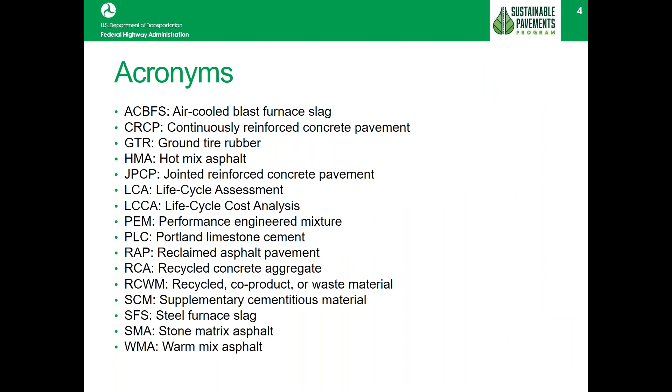Good afternoon. Our speakers for today will be Khadija Ngozi Bullock and Tom Yu. This is a list of acronyms that will be used throughout the presentation, so if there's something you need to come back and check, this is where you'll find it.

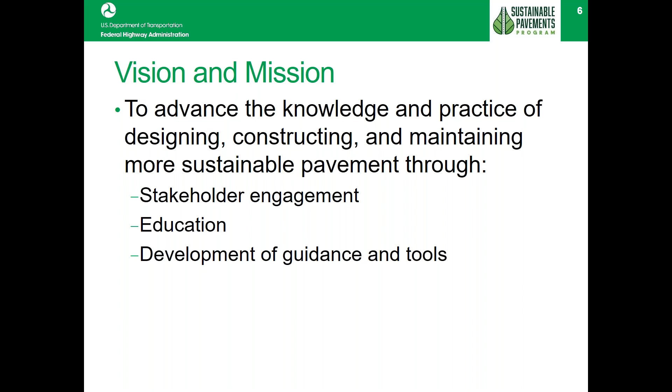I'll give a quick background on the Sustainable Pavements program, which began in 2010 with the vision and mission to advance the knowledge and practice of designing, constructing, and maintaining more sustainable pavements through stakeholder engagement, education, and development of guidance and tools, which this series of presentations is part of. Also part of this is the development of the Federal Highway Administration Sustainability Ambassadors Program, a group of FHWA employees from different disciplines whose main goal is to expand knowledge and outreach within their field, complementing the Sustainable Pavements program.

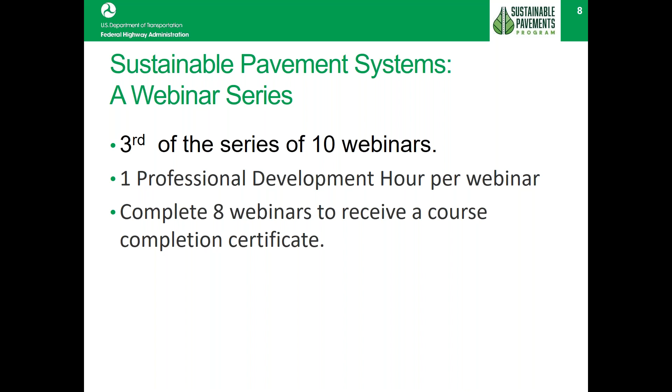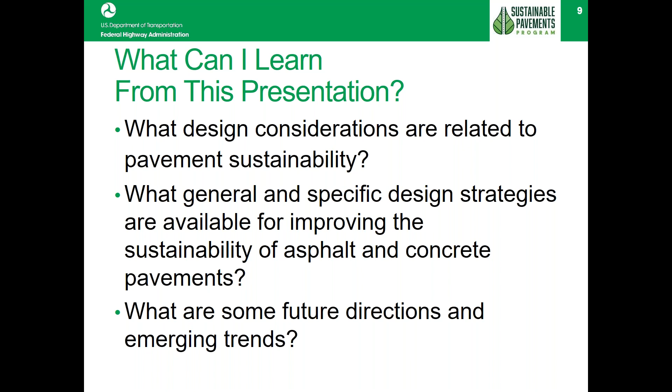What you should be expecting to learn today from this presentation: what design considerations are related to pavement sustainability, what general and specific design strategies are available for improving the sustainability of asphalt and concrete pavements, and what are some future directions and emerging trends.

From the Sustainable Pavements program, the first thing we developed was a definition, addressing why we should focus on sustainability. The goal of our sustainable pavements definition is achieving engineering goals by preserving and ideally restoring surrounding ecosystems, using financial, human, and environmental resources wisely, and meeting basic human needs such as health, safety, equity, employment, comfort, and happiness.

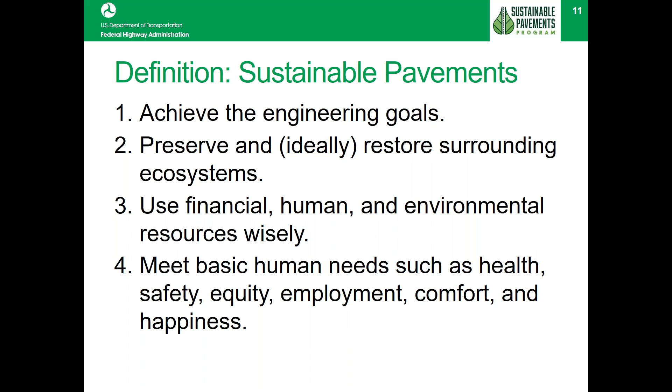With that, the benefits of being more sustainable focus on the triple bottom line, which includes not only economic benefits, but also environmental and social benefits.

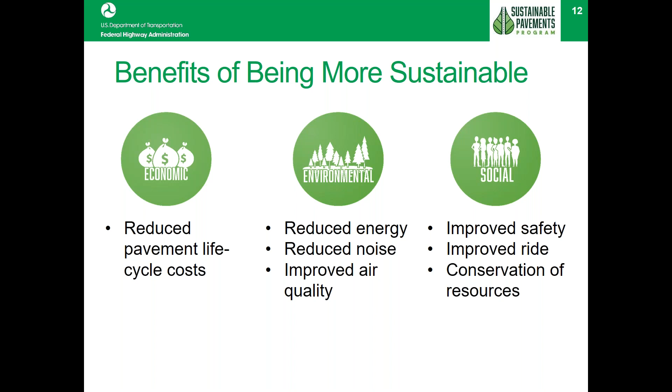There are opportunities for improving sustainability throughout the pavement life cycle, and today's webinar focuses on the design aspect of the pavement life cycle.

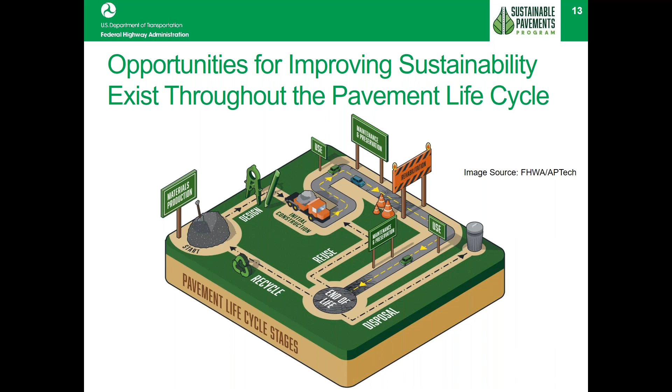Sorry about that, I got ahead of myself. With that, I will turn it over now to Khadija Ngozi Bullock, who will be presenting about the design considerations for pavement sustainability.

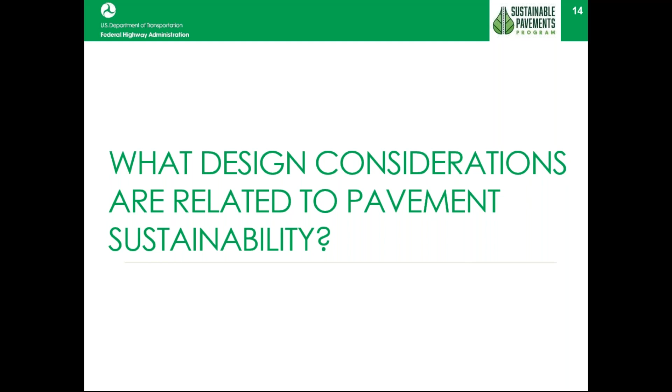Thank you, Monica. I'm going to talk a little bit about some design considerations related to pavement, and then I'm going to go into some general strategies for improving pavement sustainability, and then I'm going to apply some of those strategies specifically to asphalt pavement.

This slide shows several factors that affect pavement design. The first few we're probably all pretty familiar with. We're all concerned with the performance life when we design pavement, and we're at least concerned with the initial smoothness or friction of that surface during our pavement design.

But I'd like you to also take a look at other design aspects, such as reducing noise or splash spray, or reducing urban heat island effect or local thermal environment. These attributes all have an environmental, social, or economical impact, or a sustainability impact, and we can use these areas to reduce our impacts overall or have a higher sustainable pavement.

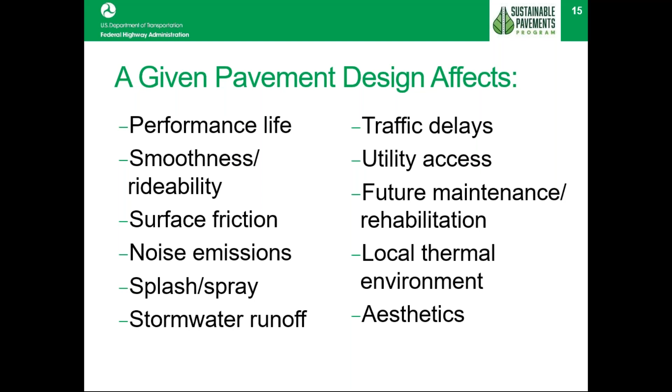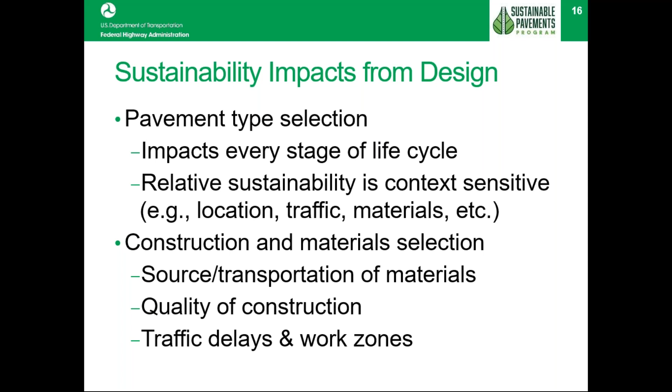So if we take a look at sustainability in our pavement designs, we should be looking at the entire life cycle of the pavement. Now, usually as a pavement designer, I am concerned with getting a low initial construction cost. But if our agencies would really take a look at targeting a low overall life cycle cost while taking a look at really good pavement materials and really good construction practices, and reducing traffic delays and reducing fatalities in work zones, we will come up with a very good product.

Now, if we look at the use of that pavement and think about sustainability impacts, if we think about not only applying a smoothness criteria during the initial pavement, but throughout the life of the pavement, we will have a more sustainable pavement. We know that rough surface will have higher fuel consumption and particularly higher emissions. So a smoother surface would reduce that while also potentially reducing safety concerns.

A longer life pavement generally means initial higher costs, but for the life cycle of that pavement, there would be reduced costs. And we should also take a look at not only the initial construction, but how we will be rehabilitating that pavement over its life cycle. And then at the end of that life cycle, what will happen to that material?

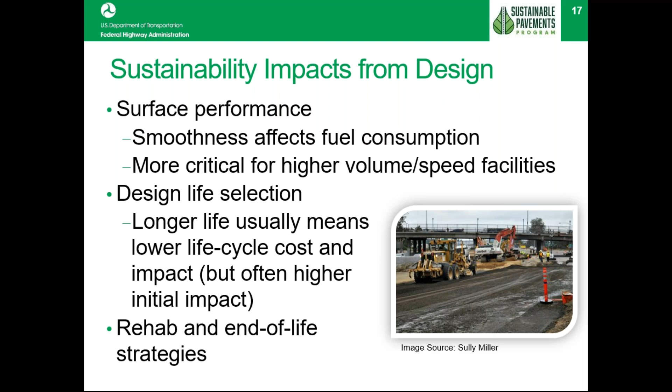Talking a little bit about some of the design aids that we can use for a more sustainable pavement system. This slide here talks about ME design. Now, I know all of us are using various methods for our pavement designs, whether they be a state or local table using state or local mix, or perhaps you're using the 1993 AASHTO Pavement Design Guide, or perhaps you're using the new ME design.

Some of the particular aspects of design that we should incorporate for a more sustainable pavement is to consider the entire life cycle of the pavement, to consider your construction techniques, to have a better way to identify pavement distress or the time it will take to achieve a level of pavement distress, and to be able to incorporate different types of materials will help you in providing a more sustainable design.

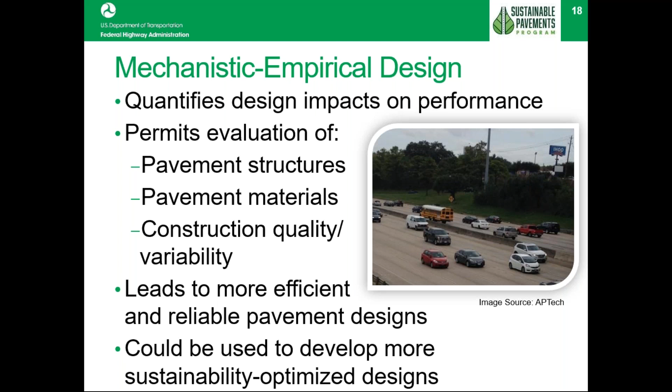And this will really help you to kind of minimize some of the pavement thicknesses, reducing material costs, and some other things that we'll talk about further in these slides.

In addition to a high-quality pavement design aid, we also need to look at design aids for life cycle cost analysis so that we can incorporate costs of the rehabilitation and preventative maintenance that the pavement will need during its life cycle. We should also be looking at environmental aspects, and a life cycle assessment can help us in taking a look at the environmental impacts of our pavement design.

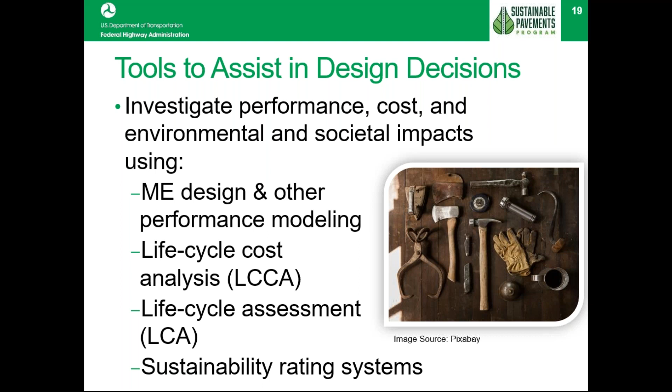As well, we should be taking a look at how we would be improving sustainability and applying some sort of rating or metric for that so that we can track our progress and compare projects. All of these sources, the Sustainable Pavements Program, has references on their website, and we will give you a link to that website at the end of this presentation.

Let me talk a little bit about some general strategies for improving pavement sustainability. The first I've already mentioned, that's achieving a longer life, and this is the longer life of the entire pavement. And I talked a little bit about doing that with a high-quality pavement design tool, as well as using high-quality materials and high-quality construction techniques.

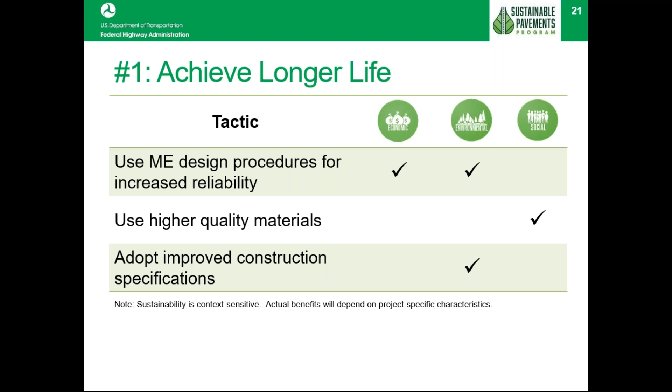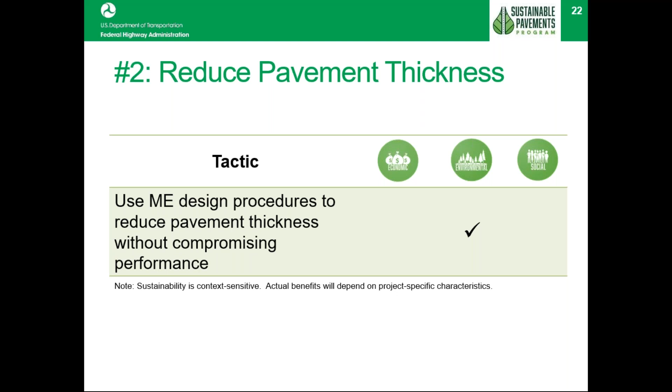In doing so, we will ultimately spend less money over the life of the pavement. If we reduce our pavement thickness, we will be reducing the materials used in the pavement system, which will ultimately reduce not only economic costs, but will contribute to less of an impact to the environment. And using high quality design tools can help us to do that.

We want to consider using a higher pavement structure in areas that require it, where we have high traffic lanes. So consider if you've got areas where you know you're going to be having higher traffic, or maybe you've got high occupancy lanes or truck lanes, consider maybe only doing deep or significant pavement sections in that area as opposed to applying that pavement section over your entire roadway.

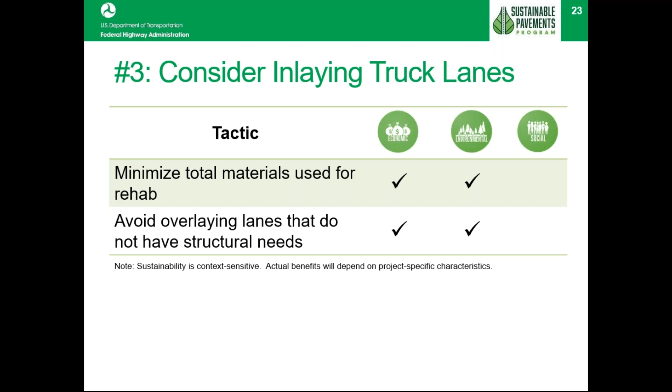Or, in another aspect, consider rehabilitation of your shoulders in a less stringent time frame than the rest of your roadway. This again reduces materials.

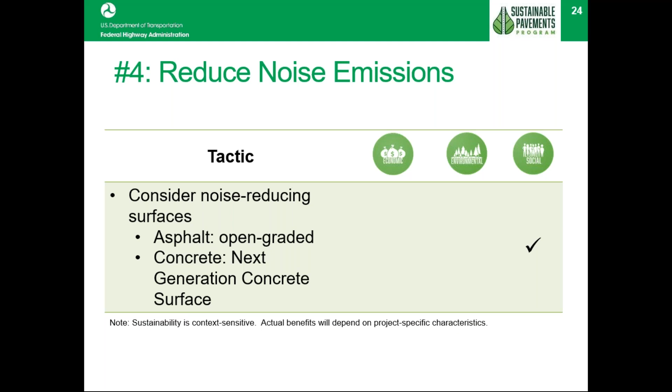We don't always consider this, but reducing noise is certainly a societal impact, especially in urban or residential areas. This is often done with the use of open graded aggregate in your surface asphalt mix. Sometimes you can also achieve a quieter ride with well-textured concrete.

Again, we'll talk about achieving and maintaining smoothness in our roadway as a way to improve sustainability. This helps us reduce fuel costs as well as emission costs.

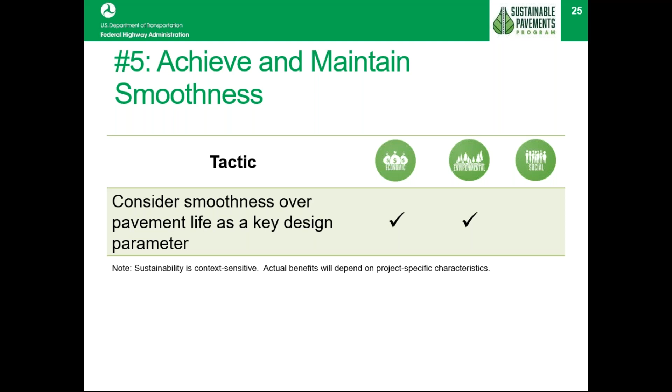Not only do we want to maximize the use of recycled materials, but also local materials. Our bottom line should be reducing the amount of transportation of materials brought into the site. This reduces a lot of impacts to our environment.

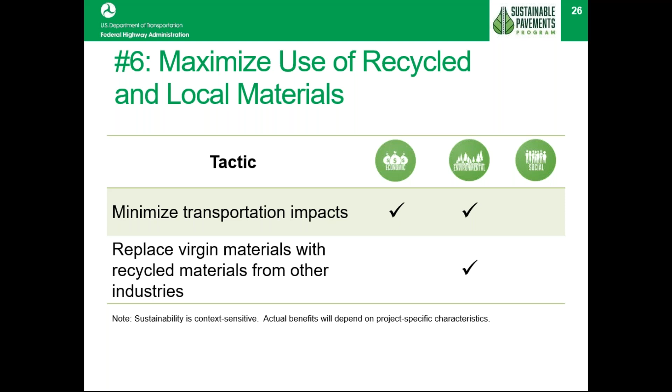But we should also consider, if we have the opportunity to use local virgin materials, we should do so, because it helps the social and economical aspects of the local area, and again, it reduces the amount of material we're trucking into the site.

We don't always have control over utilities, but if at all possible, we should coordinate with utility companies during the pavement design so that we have less impact to those utilities during construction. This means that if there's going to be some sort of utility repair, we try to get that done before we construct our new pavement, so we don't have fresh cuts coming in shortly after construction.

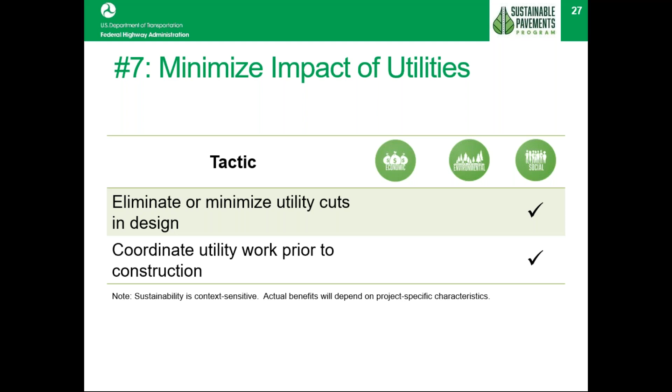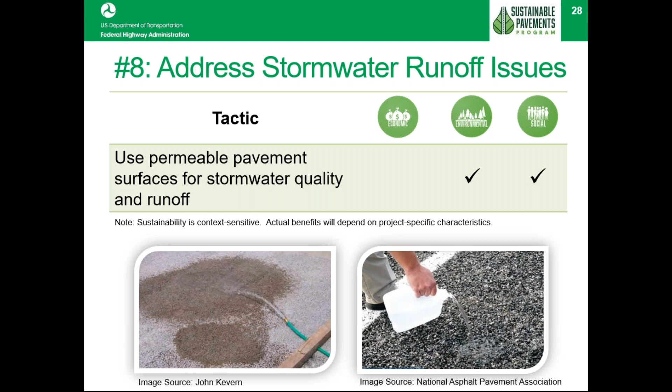In a more innovative approach, we should also try to address stormwater runoff issues, if at all possible, with our pavement designs. This isn't something we can do everywhere, and it's certainly something we should limit to very localized areas, but I'll talk a little more about that in the next section, where I'll discuss how we can apply some of these specific design strategies to asphalt surface pavement.

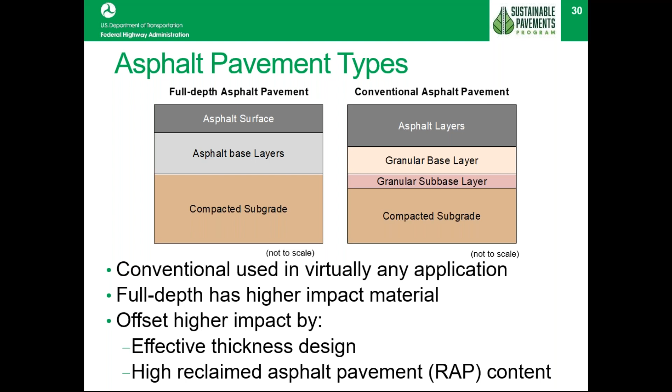Looking at your full depth asphalt pavement section on the left, where we often use higher quality asphalt in the surface materials, you can use recycled asphalt materials in your asphalt base layers. Again, both of these pavement structures could benefit from minimized pavement thicknesses with a high quality pavement design.

When you're faced with local virgin material that is not quite suitable for the traffic loading it needs to support, keep in mind that some sort of stabilizer, such as cement, can be used in these situations as opposed to trucking in higher quality granular material.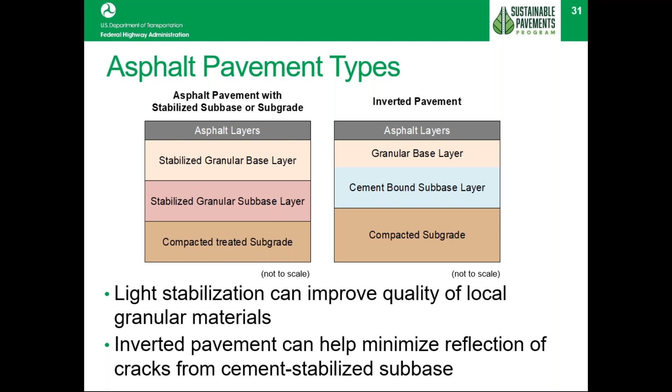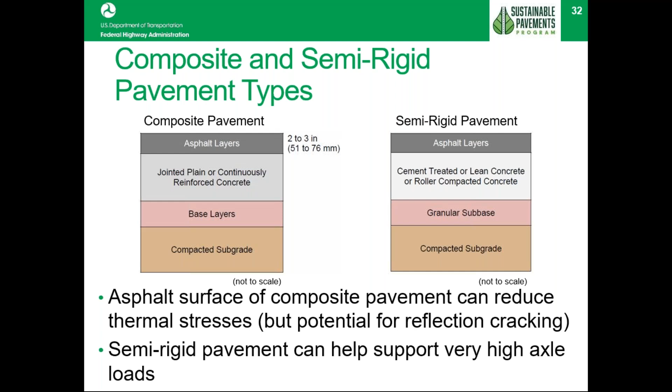Again, this is another way to treat or rehabilitate roadways, particularly if you've got a concrete roadway and need to rehabilitate it with a lower cost material such as asphalt.

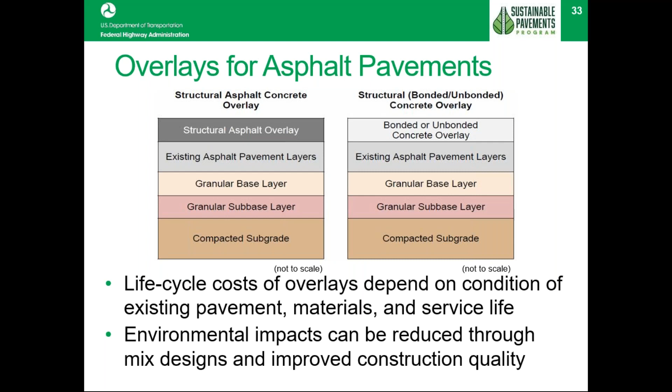Speaking of overlays, as I've done on most of these slides, here again is a reminder that overlays for asphalt pavements are a great way to rehabilitate your pavement and extend its life. We want to reduce the amount of material used in the overall pavement life, but use that material wisely to extend the life of that pavement as much as possible.

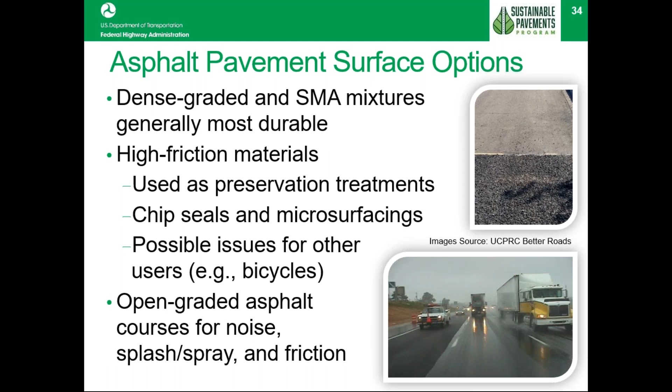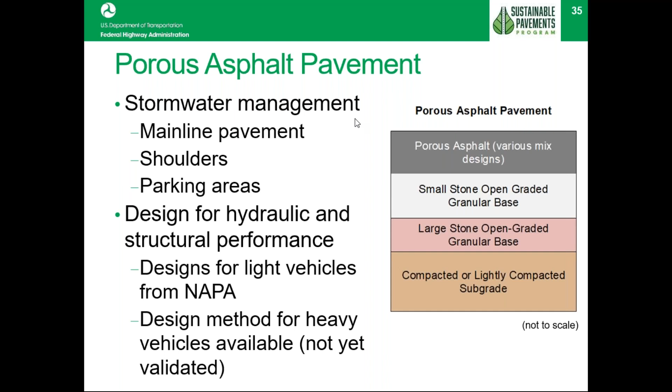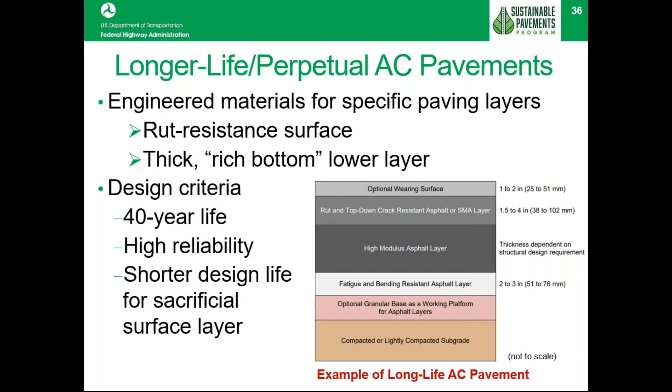Another innovative concept, which I've touched upon, is perpetual pavement. A more sustainable pavement has a sustained life cycle. The idea is designing a pavement with high quality layers to withstand the traffic load that will last for an extended amount of time, with the plan that you'll replace the wearing surface through frequent rehabilitation projects—this is the ideal pavement design for higher or improved sustainability. So when looking at pavement designs, you want to stress looking at the entire life cycle of the pavement, while also considering what it will cost, what materials will be used for rehabbing that pavement, and how you can reduce impacts to the overall environment and society.

So with that, I'm going to let my colleague talk about how you can apply these design strategies to concrete pavement. Tom is a pavement design program manager in the Office of Infrastructure at Federal Highway Headquarters in Washington, D.C., and he's going to talk about concrete pavement. Tom?

Thank you, Khadija. Yes, I'm going to be talking about sustainability for concrete pavements. Before I get started, I want to point out that both Khadija and I don't work on sustainability per se, but we are what's called sustainability ambassadors—people invited to participate in the sustainability program to become better aware of what sustainability is all about, see how it applies to what we do, and spread the good word.

What I've come to realize is that sustainability isn't something we do separately from what we normally do, but is becoming more and more a necessity. For example, for concrete pavements, in many places the availability of good aggregate is becoming more scarce. So dealing with that is becoming a necessity. Things like fly ash—the supply is becoming more scarce—so how we deal with that is becoming a necessity. In some ways we need to find sustainable solutions to do what we need to do. Sustainability is something where we may have to find solutions to the things that we need to do.

For concrete pavement, first of all, the primary benefit is its long life. There are many different types of concrete pavements, but today primarily we have jointed plain concrete pavements and continuously reinforced concrete pavements. The way we go about selecting pavement type depends on many things, primarily cost, but we could also consider sustainability as one of those criteria.

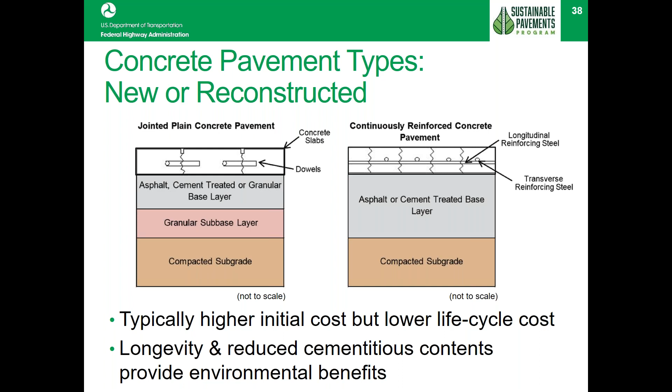In places where access is very difficult, in heavy urban areas for example, we might look for a very long life solution like CRCP, so that we don't need to disturb the public so often. So concrete pavement might often be considered a slightly higher cost option, but again, its long life is the benefit we get to offset that higher initial cost.

Composite pavement for concrete two-lift paving is something we can consider if we have issues with availability of quality aggregates, or if we want to utilize recycled material. We could use recycled or lower quality material in the lower lift and more durable material in the surface layer. This is one sustainability solution that helps us build quality concrete pavements.

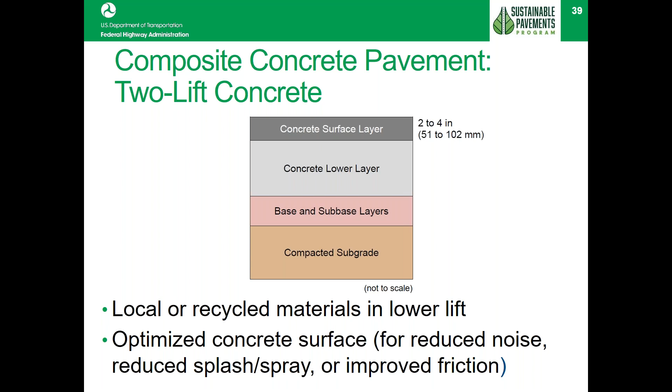We have various options for overlays, but the best time to consider preservation of concrete pavement is right up front at the design stage, so we build a pavement that doesn't require a lot of maintenance or deteriorate, so we don't have to deal with distresses over the life of that pavement. By the time we have to do overlays, in some ways we're fighting a losing battle, but we do have a large network of pavements where we could use the overlay option to preserve them.

Asphalt overlay can be a very effective solution to extend the life of existing concrete pavement. By placing relatively thin asphalt on top, it greatly reduces the stresses that the concrete pavement feels, so we can greatly extend the life of that pavement. But we have to be careful about the condition of the underlying pavement. If there are a lot of distresses in the underlying pavement, that will reflect right through, so that's one thing to consider if we're thinking about doing an overlay.

Bonded concrete overlay is also possible, but that needs to be done with extreme care, because bonding fresh concrete to existing concrete involves a lot of art. It's absolutely critical that the two layers stay bonded together for the solution to work. For the most part, it's probably a feasible solution if you have an existing CRCP, but if you have a jointed or long-paneled concrete pavement, like jointed plain concrete pavement, bonding is probably a higher risk solution. In those cases, you might be better off just doing an asphalt overlay.

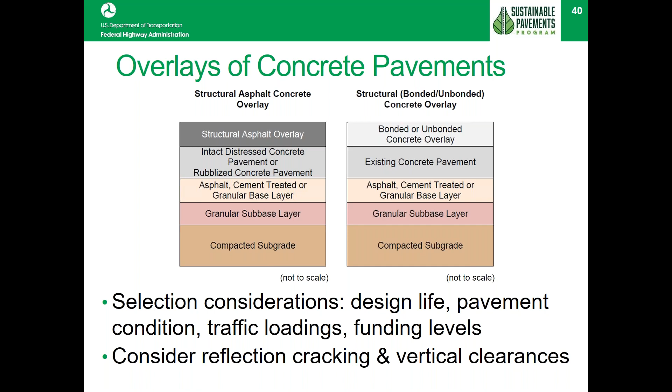There are various surface texturing options for concrete pavement, and the surface is what the traveling public is most sensitive to—we want a smooth and safe surface, so there are various options for creating that surface. Most often, we do some sort of turf drag and tining in the U.S. In Europe, they tend to favor exposed aggregate, and either type of texture is workable. But if you have an existing pavement that requires a new texture, we have different options: we can do diamond grinding, or grooving, or grinding and grooving to keep that texture lasting longer.

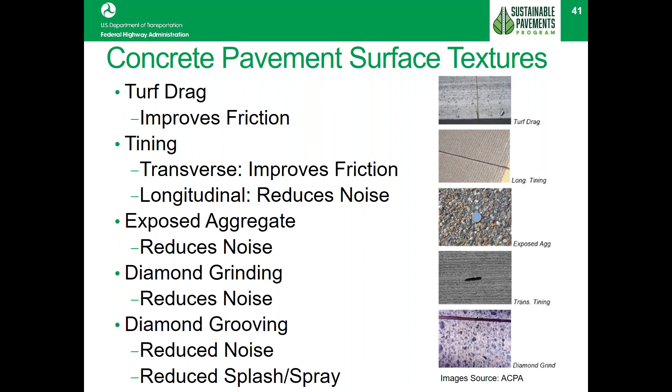A concrete pavement option is also available for stormwater management. I don't particularly favor doing this because, as you all know, water is like the worst enemy to pavement, so for me, mixing water and pavement doesn't really make sense. But if you have issues with stormwater management, this is a possible solution, and there is a concrete solution for that.

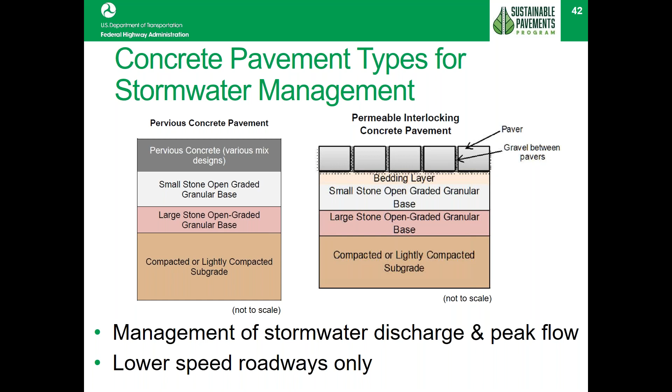The biggest benefit of concrete pavement is long-life concrete pavement, and ideally we ought to build pavements to last as long as the material lasts. We typically think of pavement as having a design life, and we tend to think that at the end of the design life, if the pavement is still in good condition, we're over-designing. But the reality is, once we put the pavement out there, we have to keep it forever. So the easiest way to maintain that pavement is for it not to develop distresses at all.

What we really should be doing for a sustainable solution is building the pavement once instead of twice or three times—the sustainability benefit is obvious. There's tremendous cost savings, as well as social impact savings and environmental savings. So a long-life solution is something we should definitely look into. We think of 40 or 50 years as a long time, but we shouldn't really think about any specific design life in mind.

We should just build a pavement to last, like the Romans have done. So pavement foundation becomes important too. In current design procedures, we don't pay a lot of attention to foundation because aggregate base or subgrade really don't impact the pavement response of concrete pavements very much, so we don't tend to think it's very important. But the reality is, if we have contaminated base, or water problems in the base or subgrade, that pavement will not last a long time. So it is extremely important for the longevity of that pavement to have a good foundation, and this is one of our focus areas at Federal Highway.

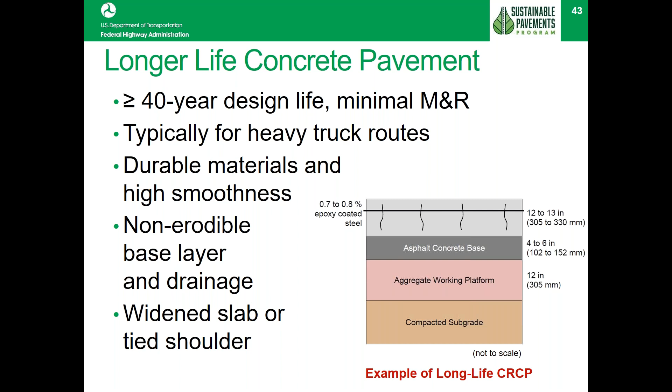There's also a lot of very good information about recycling. We can use recycled concrete for many different applications, including base materials, fill materials, as well as recycling aggregate right back into new concrete. There are very good publications from the National Concrete Pavement Technology Center, the CP Tech Center at Iowa State. They have a whole website dedicated to recycled aggregate.

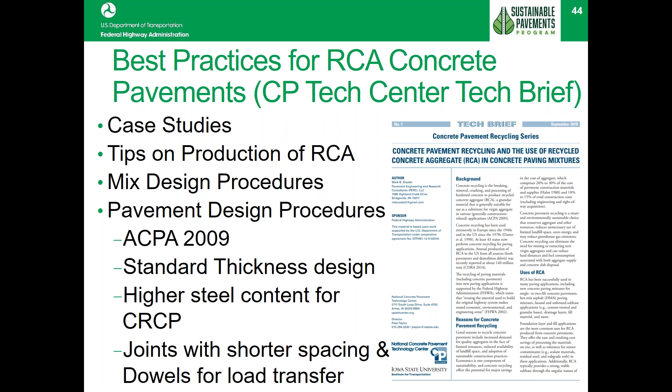So, what are the future directions and emerging trends in pavement design? It's actually mostly the things we discussed today. We need to think about performance cost as well as environmental and social costs, not just for sustainability in itself, but out of necessity. Materials like aggregates and fly ash are becoming more scarce, so we need to find sensible solutions. That means designing pavement to perform better.

Performance-related construction specifications and materials are becoming more important, becoming part of our whole pavement strategy: designing pavement to last, designing materials to last, and ensuring construction quality so that the pavement constructed will perform as intended. This includes using new materials such as recycled materials and new binders. New binders might refer to things in asphalt or in concrete pavements, like supplementary cementitious materials.

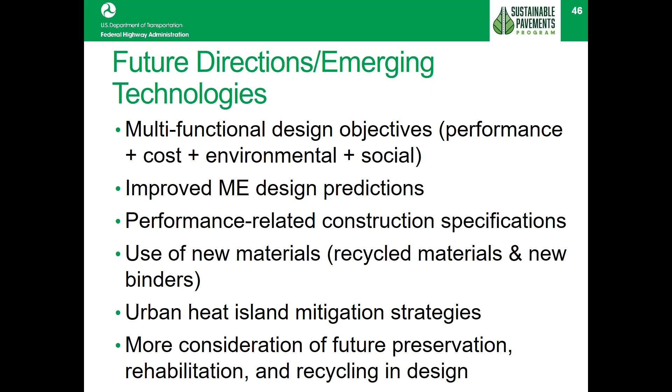We can use different design strategies to deal with urban heat island effects, and we can consider future rehab and preservation factors at the design stage. So we design pavement to last, rather than designing with a fixed design life in mind and constantly having to deal with distresses, repairs, and rehabilitation. That's all I have on the concrete pavement part. I'll turn it over to Monica for the summary.

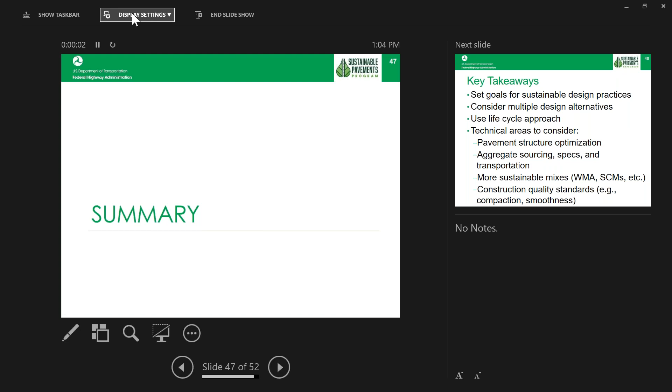Okay, with that, I will wrap up the presentation with some key takeaways. From this presentation, you're able to set goals for sustainable design practices, consider multiple design alternatives, and use the life cycle approach. Think about technical areas to consider, such as pavement structure optimization, aggregate sourcing, specifications, and transportation of aggregate, as well as other sustainable mixes such as warm mix asphalt, and construction quality standards such as smoothness and compaction.

On continuously reinforced concrete pavement, we put a lot of steel to hold the cracks together. Cracks are expected in this type of pavement, but they're held together by the steel in the concrete. So they tend to be a little more expensive, but probably one of the more durable types of pavements we can build.